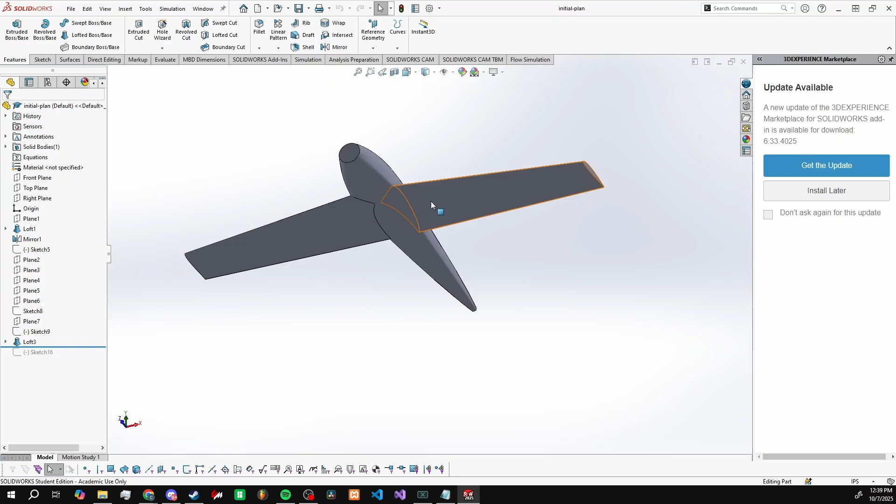Today we're going to be going over how to make formers for the wing. Before you get started on the main parts of your wing, like the formers, spars, and all of that, I highly recommend you have your rough shape for your fuselage. You don't have to have the empennage, but for the sake of this tutorial, I excluded that because we're going to be focusing on the wing here.

First and foremost, we're going to have to figure out where we want the wing to interface. A lot of you can do something where you leave a gap right through here, and then just have the MonoKote go around the formers.

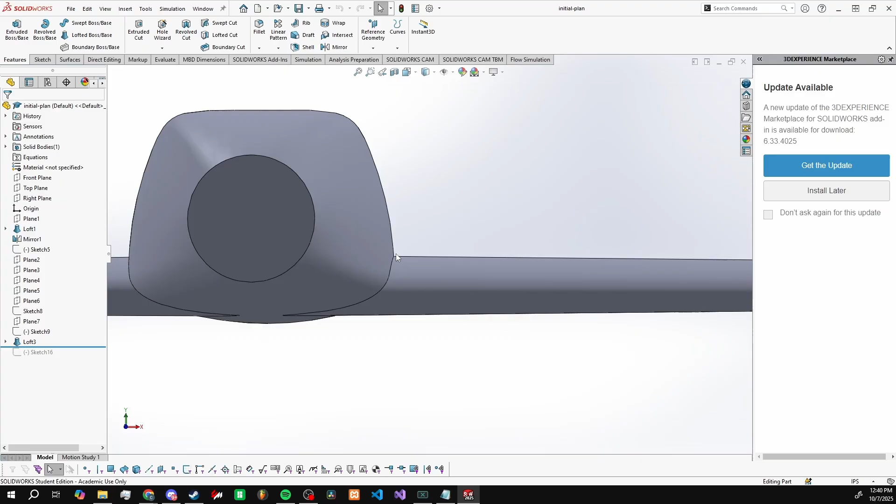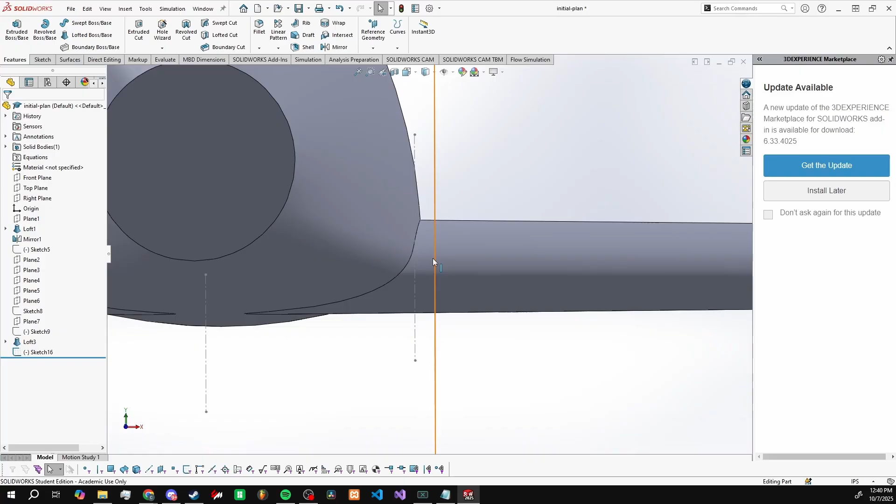For example, I have it here. There's a sketch right here that is going to essentially cut the aircraft. So your wing, the formers for your fuselage include this part of your wing. Then have your wing assembly be another thing, and push it all together, glue it, put the spars inside of the wing box, that type of thing.

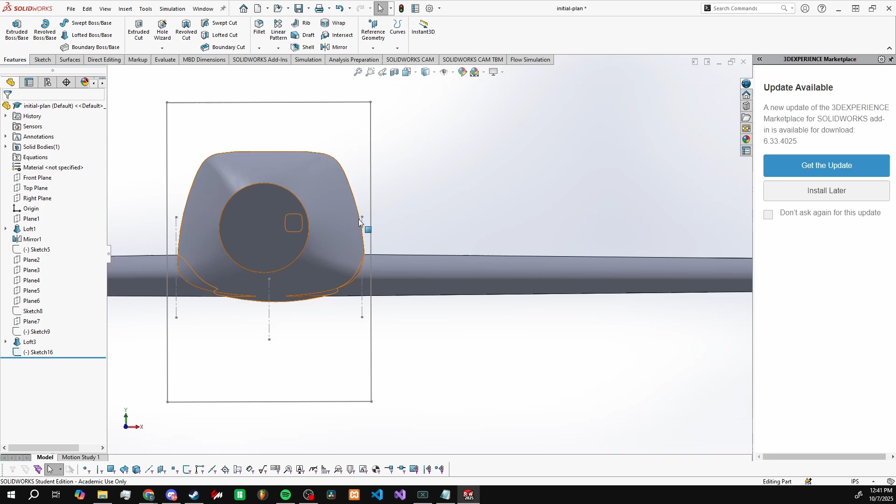Or you're not going to have this cut, you're just going to have the fuselage formers, and then this entire wing section highlighted in orange here is going to slide directly into the fuselage, and you'll assemble it that way. But if you want your fuselage to be its own thing and your wing to be its own thing, while your fuselage still includes this section here, we're going to go over that real quick.

First and foremost, we're going to get the sketch to cut the fuselage out. Make sure you have a copy of this. This is the initial plan. I also have initial plan, wings, and fuselage so that we can edit it later, and those will be another tutorial.

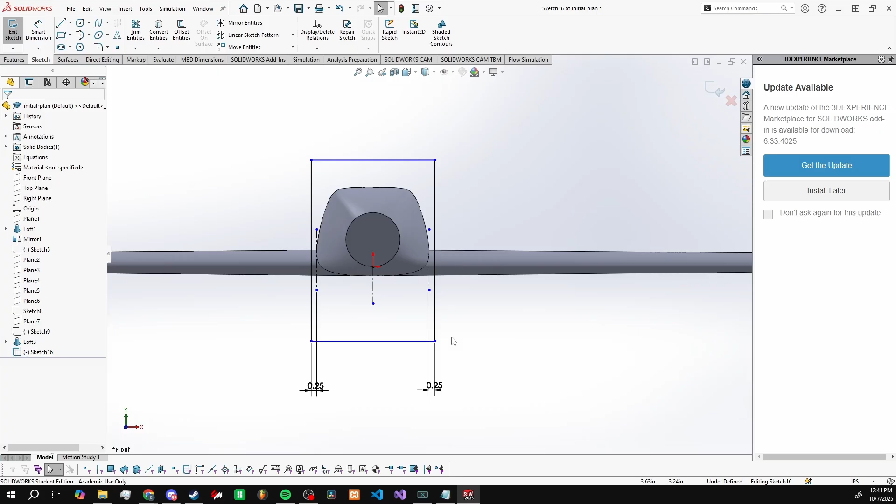What we want to start with is to set up our cut box at the edge of the fuselage, at the widest point. As you can see, I set up a center line on either side, and dimensioned it around a quarter of an inch away. For this tutorial, we're just going to put it at 0, so it cuts exactly at the edge of the fuselage, and we'll adjust it here as well.

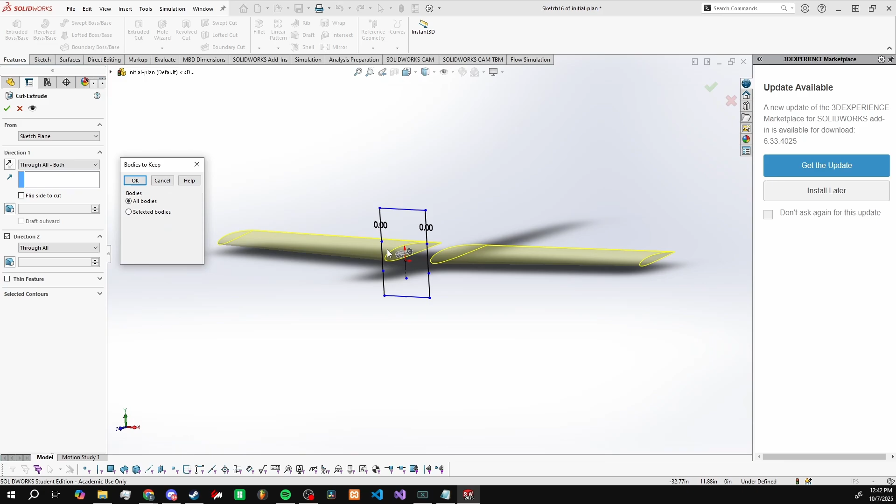So we'll do that, and then we're going to cut the entire fuselage out. We'll do through all and both, and just cut it there. It'll ask you if you want to keep the bodies. The only bodies that should remain are going to be the two wings, so we'll just hit accept.

All right, so now we can get started on the formers. What we want to do is start sketching on the top plane. There's something finicky about the measurement aspect.

If you were to smart dimension from here to, hopefully I can get it to this point there. We'll have to set up a center line here. So we'll start a center line there, end it there, hit escape, and then smart dimension it.

And it's going to give us the driven dimension. Obviously this line can't change because it's got relations at the corner here and the corner here, so it won't let it move. What we want is this value.

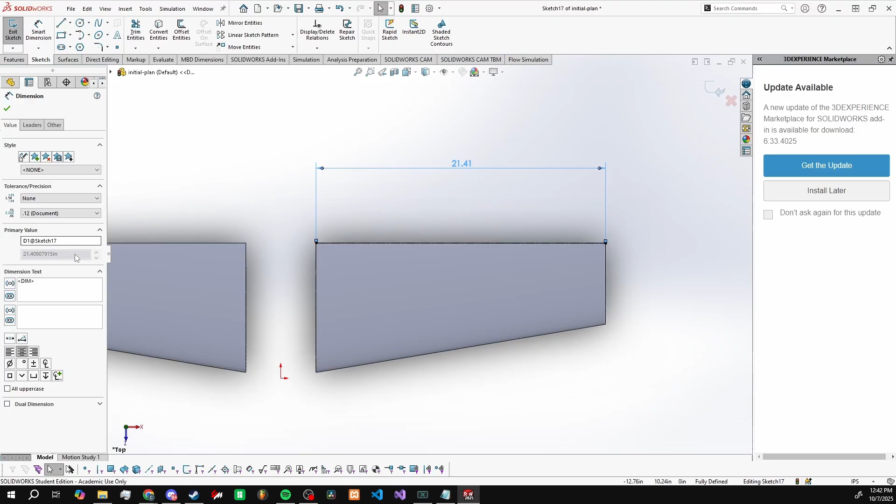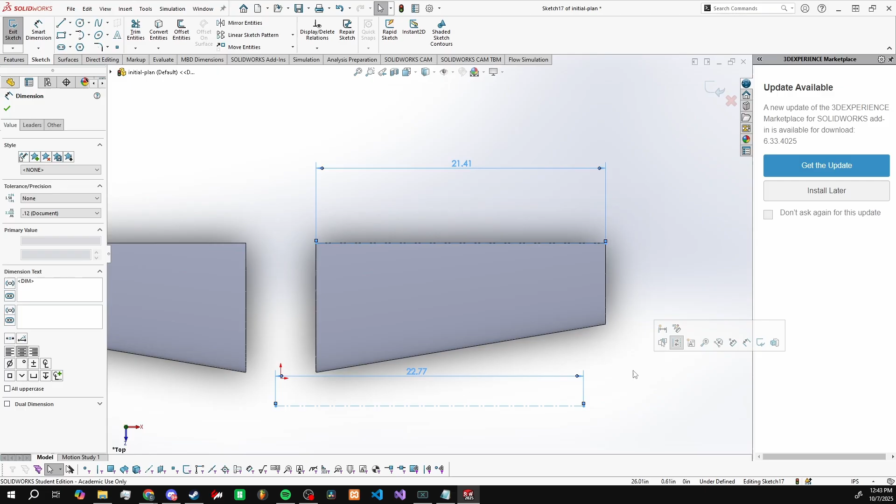In order to pull this value out, one thing you have to do is add another center line, arbitrary, doesn't matter where. You're going to smart dimension that, and it's going to give you this little box here. Once you have this box, all you need to do is click it, and it shows you the exact value for this dimension here. So what you want to do then is hit Control C to copy it. You'll hit close, and then you can delete everything in the wing section right there.

So next up is going to be cutting out the slots for the formers. Now the formers in AVD, if you're using balsa, are going to be 3/16. So we'll dimension that real quick, 3/16, and then we're going to make this line flush or collinear with the inside wing root. We'll do that real quick.

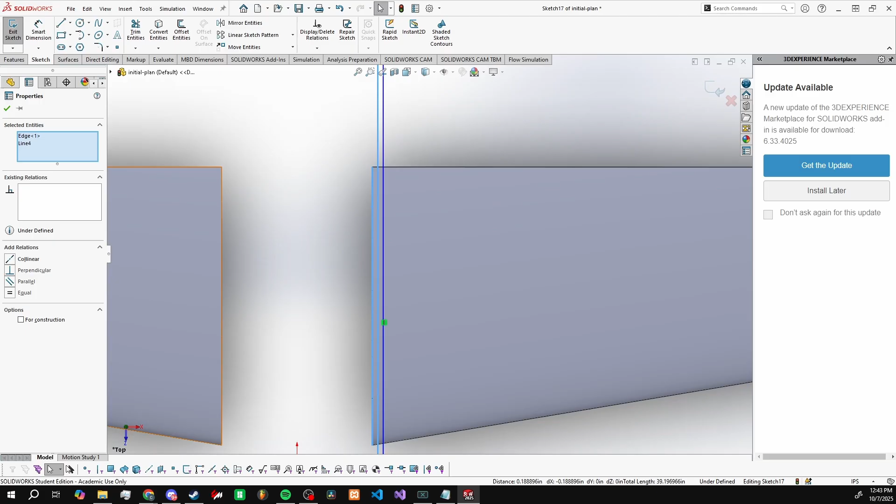Make sure your box is going to cover all of the wing when we do something called a linear sketch pattern, and it's going to continue this way. So if you're starting at the wing root, for example, you'll want this box to be larger than the distance of your wing root.

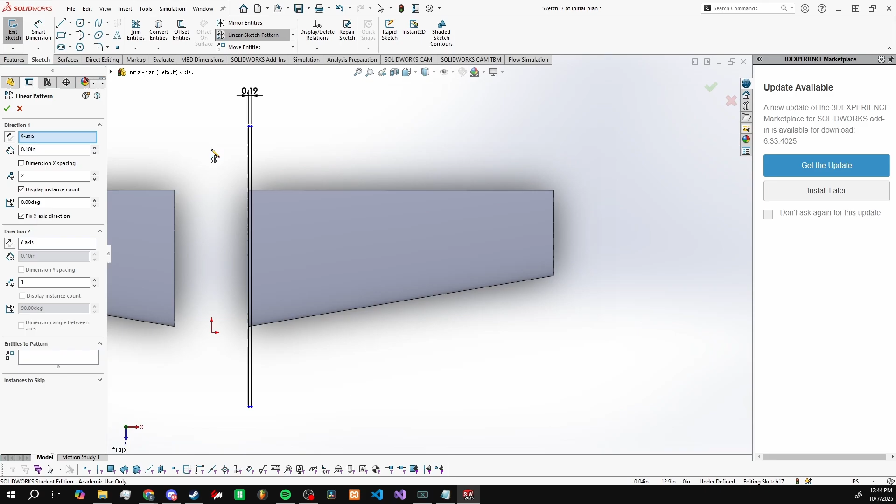So we will start with something called a linear sketch pattern. Before we get into the specifics of it, if we look at our wing here and the axis chart in the bottom, you'll see that our wing extends into the -x and the +x direction. So what we want to use for the linear pattern is going to be the x-axis.

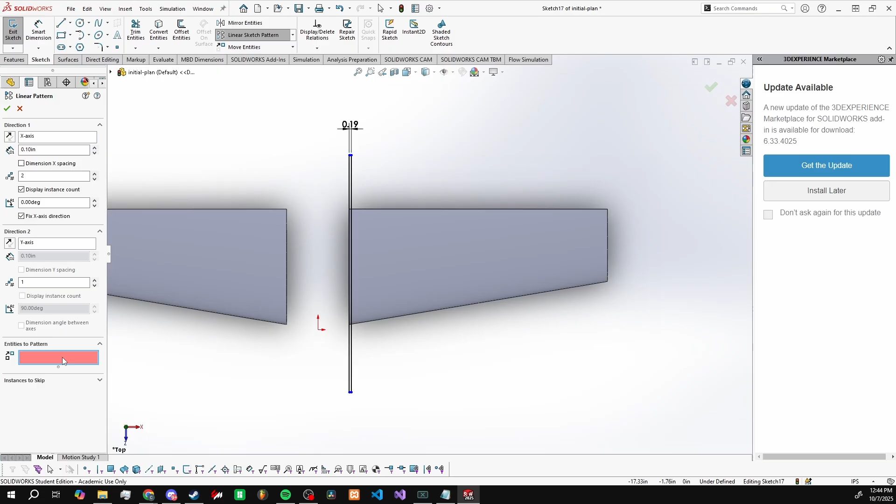Once we have that, we need to figure out the entities to pattern. Unfortunately, you can't just click and highlight, so you have to click inside this box here and then click each individual line of our former rectangle.

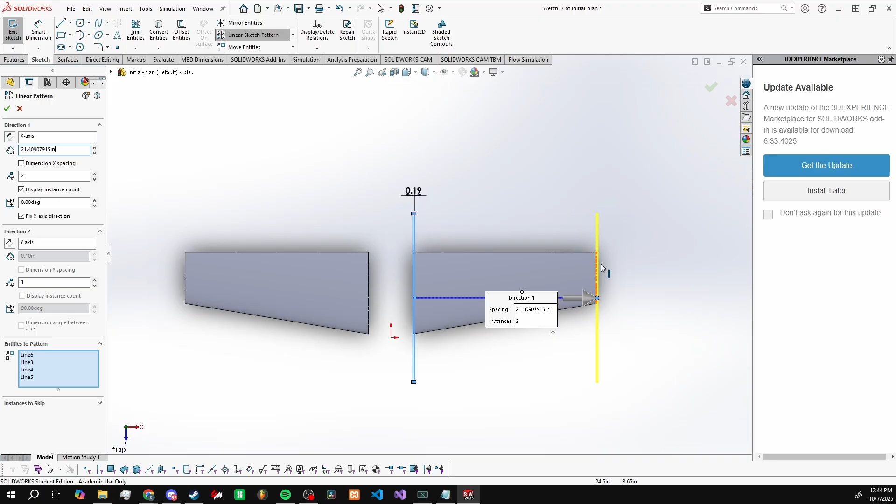Okay, so now that we have that set up, we're going to need to set the distance. The distance is going to be just the distance of the wing. So here you can have it right here. But you can see it does something awfully weird. It doesn't put the former outline on the inside of the wing, it puts it on the outside.

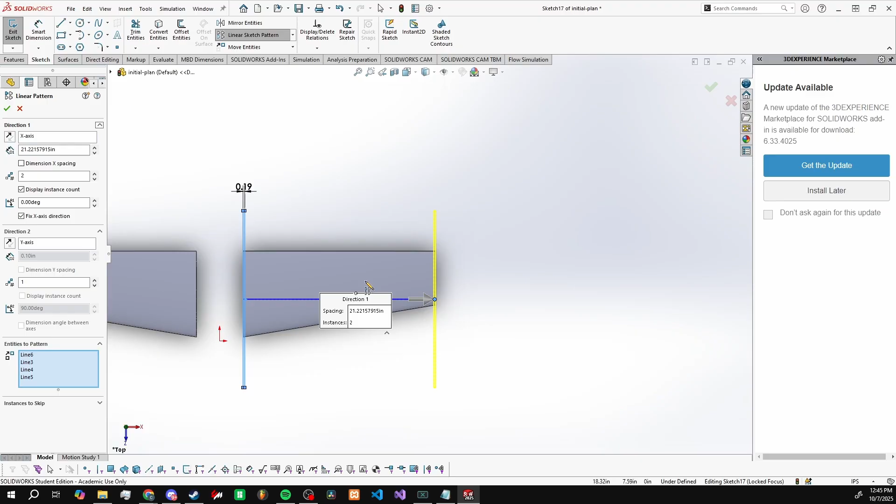So in order to fix that, you just subtract by 3/16, which is obviously the width of the balsa. And then it puts it there. So we have around 21 inches, or 21.2 inches, to play with when it comes to the spacing in between the wingtip and the cord.

What we're going to end up doing is filling that up with, I'd say, 14 or 15. Usually you want around 1.4 to 1.6 inches. You can go down to like 1.2 and be fine, just know that the amount of formers you have may be a little too much, and it won't exactly benefit you in the long run. So keep that in mind. If it looks good, most likely it will be good, but always have a reason as to why you made that decision.

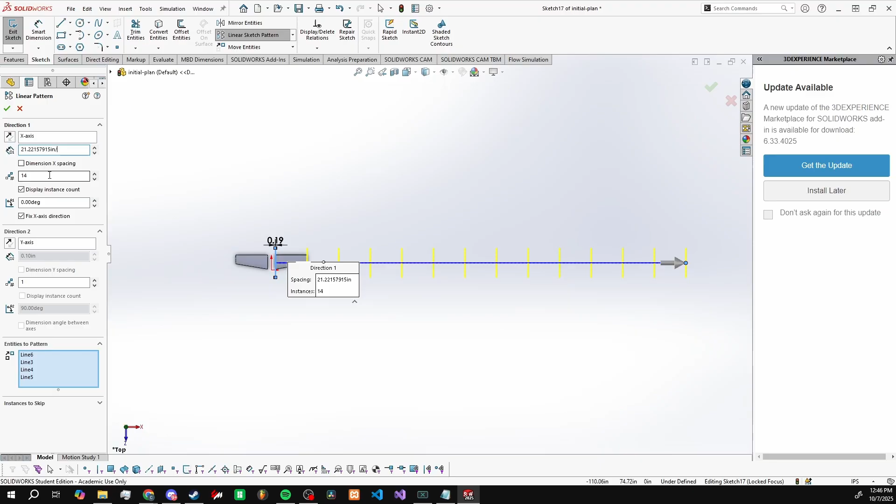So we're going to do 14 different formers here. And you can see that they extend all the way out to here, because each of them are spaced by 21.2 inches. In order to fix that, we're going to divide the distance in the x-axis direction by n-1. So our n here is 14, so we divide it by 13. And here, if you look inside, all of your formers are going to be evenly spaced, and they're going to include the wingtip former, which is what we want.

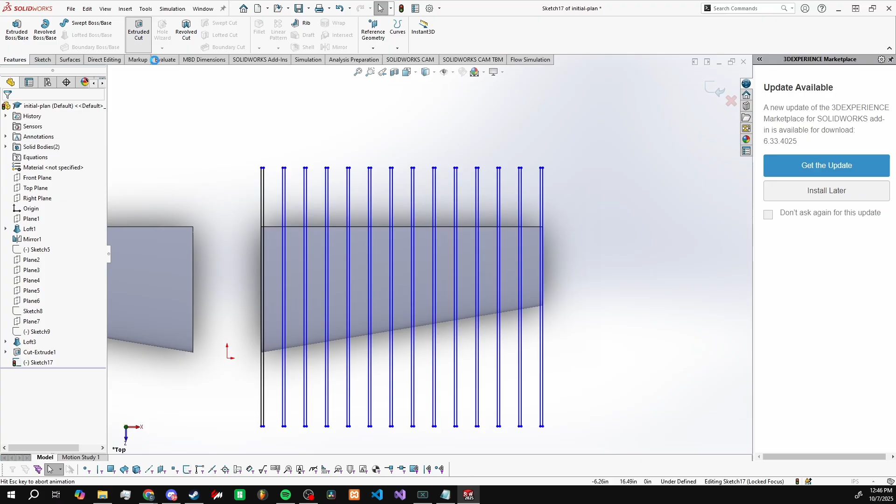It's fantastic. So we're going to hit the OK button, and it's going to give us our sketch. Now, the thing is, when you try and cut it, so we'll do an extrude cut, it's only going to cut inside of the former box here. So if we hit the check mark, it's only going to leave this gray exposed section here.

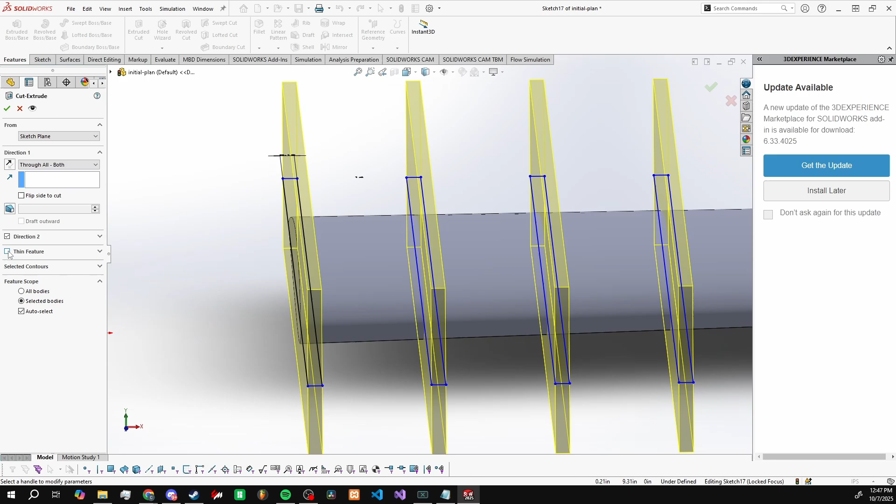Instead of having it do that, we're going to use something called the thin feature. Now the thin feature cuts everything outside of the sketch that you have, and you can see how it changes. So here's internal, I click thin feature and it goes external.

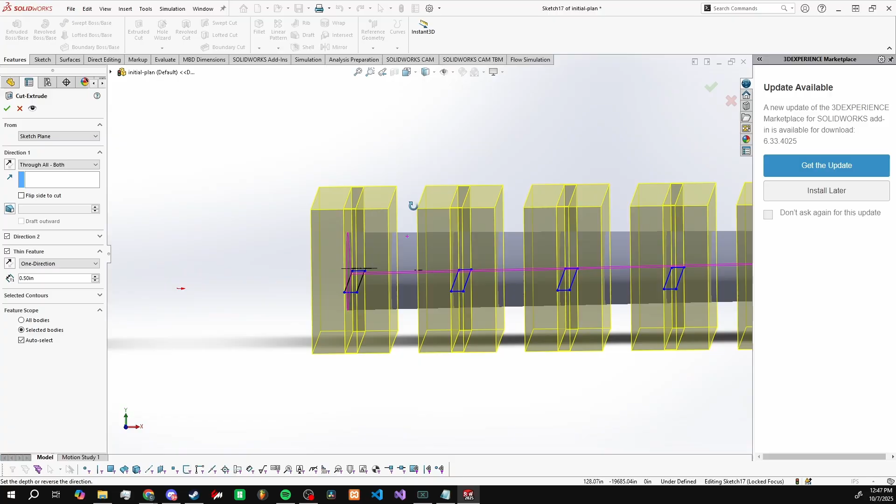If you remember, in our linear sketch pattern it said the distance between each former was going to be around 1.6. So if we increase this to 0.8 of an inch, you can see that they now overlap. It's important to make sure those boxes overlap, because if we cut it here, we're going to have this gray piece there, the formers and the gray pieces in each little section. That's something we don't want, we just want to keep the formers.

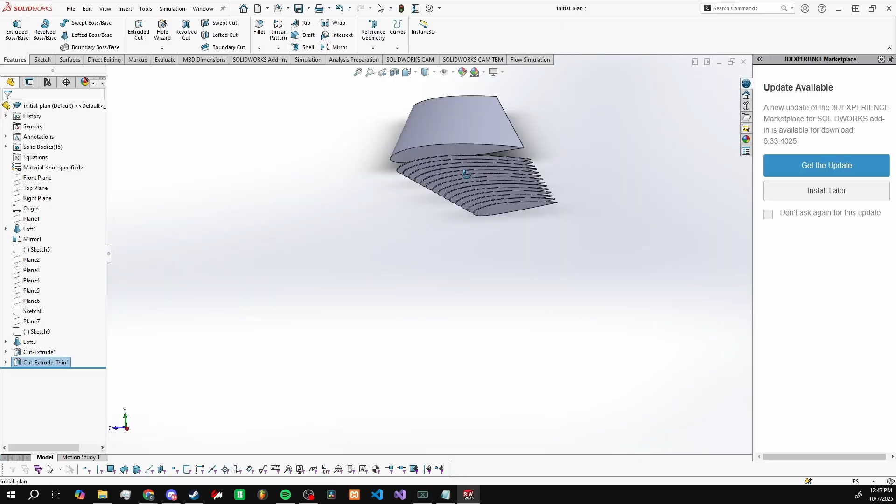So we'll increase this back up to 0.8 of an inch, and then just hit the check mark. You're going to want to keep all bodies, because that's your formers. And there you go, so here are the formers that are going to be part of your wing. There's really nothing else that you need to do.

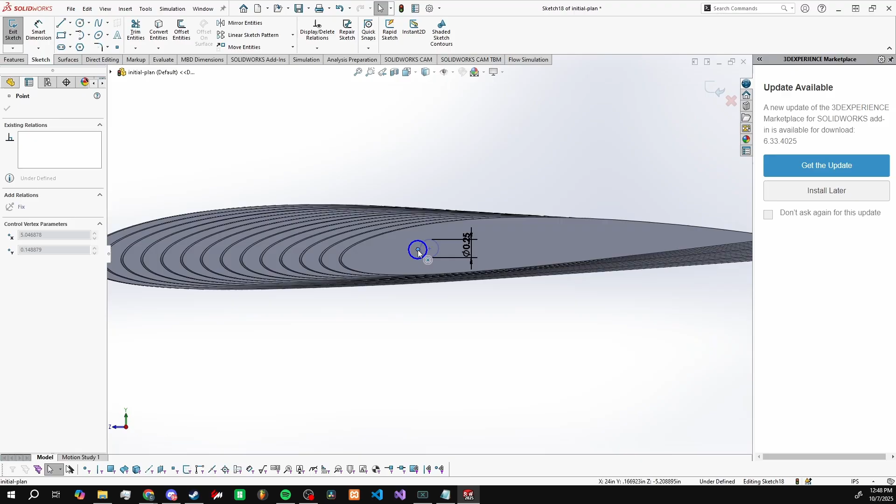You can set up your spars. So for example, just to give you an idea, say we want a circular dowel going this way. Ours is 1/4 of an inch in diameter, so we'll set that up. Usually what you do is figure out where you want this spar to be, especially if it's going to be load bearing. So it's something you guys are going to figure out when you do your model.

But for an example, we'll do an extruded cut, and then we'll do up to surface, and we're going to do till here. So obviously it's going to be pretty easy to set up all of your cuts on your ribs. You can do lofts, so if you have a square here and then a smaller square here, you can cut between each of these patterns and get it set up. So there's a lot of stuff you can do.

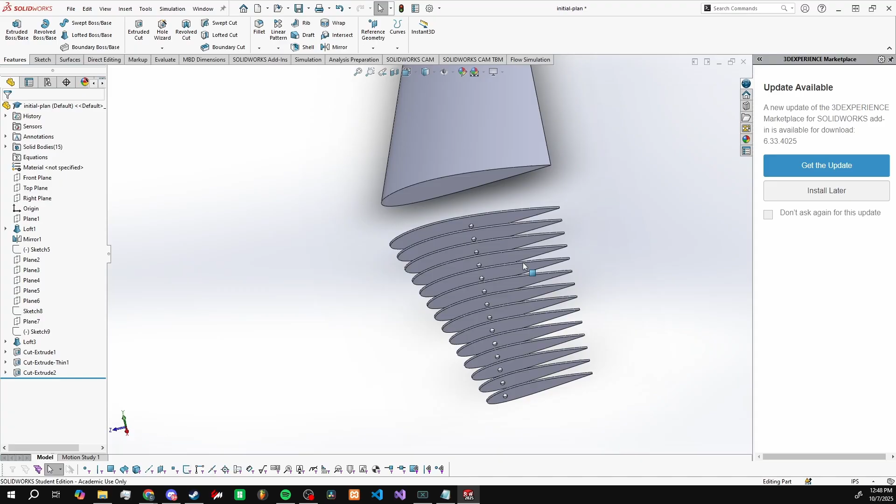It makes it very easy to go through and edit again. If you want to change everything, you're just going to have to delete this, change the number in your linear sketch pattern, and then go from there using the exact same formula that I set up earlier. So yeah, that's kind of the easiest way to make formers for tapered wings.

You can do this, this is exactly the same way you use for the fuselage, but I'll probably still end up showing how to do that for the fuselage specifically.